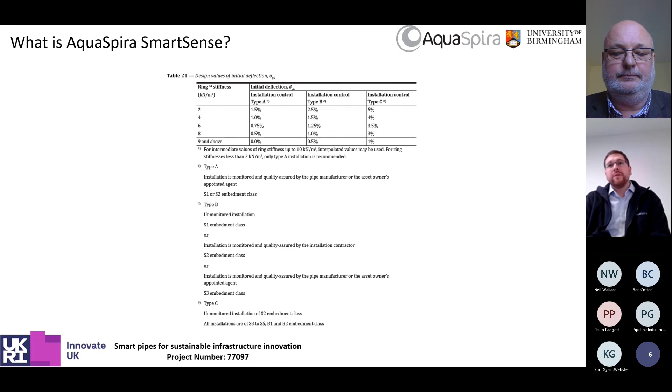Every flexible pipe manufacturer knows that installation of the product is the most important consideration when using flexible pipes. BS 9295 highlights this fact with the incorporation of an installation control type, which provides an increased deflection percentage based on backfill material and competence of the installer. For the best installations, there is a requirement for supervision and for the use of S1 material.

Now, sadly, with the increasing costs and the requirement to keep carbon emissions low or to eliminate them completely, there is a requirement to basically monitor these installations. We think the answer is the use of technology, and that might provide the answer.

By embedding sensors into the pipe, it can be monitored without the need of an extra person attending site, and potentially the primary backfill around the pipe can be changed to something more sustainable, or we can use the as-dug material on site. Previous projects of this nature have used sensors just glued onto the surface of a structure, such as using epoxy resin to glue strain gauges onto a pipe wall. We have gone one step further and embedded the sensors into the HDPE.

The original idea was developed to monitor the installation of a pipe on site, but we soon realized that sensors could be used to do a lot more. For instance, prior to installation, to monitor if the pipes have been dropped or damaged on site; during the installation, to monitor the stress and strains within the pipe, but also the compaction density around the pipe; and then after installation, to continue to monitor the structure of the pipe and its local environment.

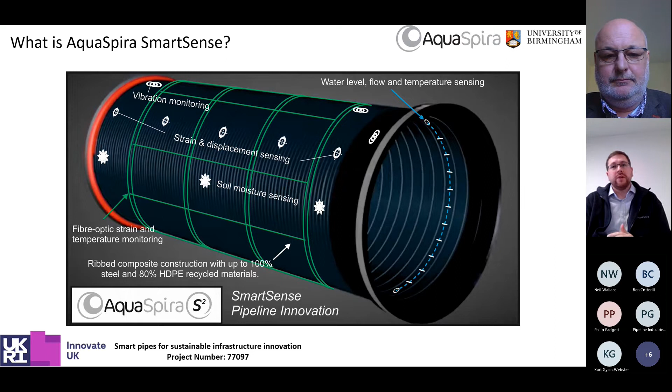In 2021, the University of Birmingham and Aquaspira submitted a research proposal to Innovate UK, where we were successfully awarded £250,000 to complete the first step of making SmartSense a reality.

So where did we start? Well, we first started by evaluating the raw materials and looking at our internal recycling streams. We looked at our use of HDPE and evaluated the internal recycling stream to make sure that the heat cycles we put the materials through did not degrade beyond the point of what the virgin material we use to make the pipes does. Secondly, we evaluated the steel that is encapsulated within our ribs.

We checked the density of the recycled HDPE to make sure that it stayed the same throughout the process as a recycled variant of it. We also used a melt flow index machine to check the flow rate of the materials to see if the different recycled material blends are still within the specifications we run internally.

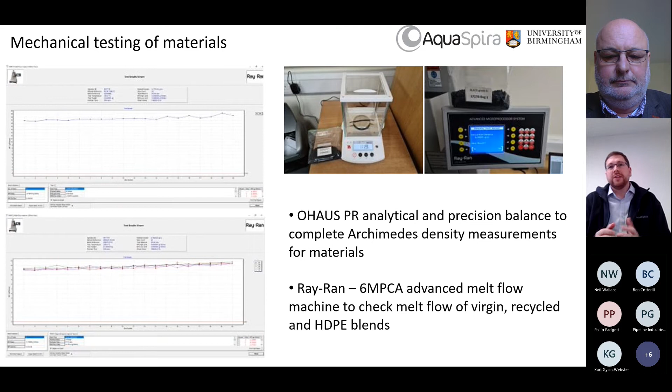We evaluated the mechanical strength of the HDPE and steel components using our in-house tensile tester machine. This entailed testing the waterway wall seams, butt welding of the component parts, and the properties of the steel. We looked at different blends and properties of materials to combine them together to give us the best mechanical properties for our pipes.

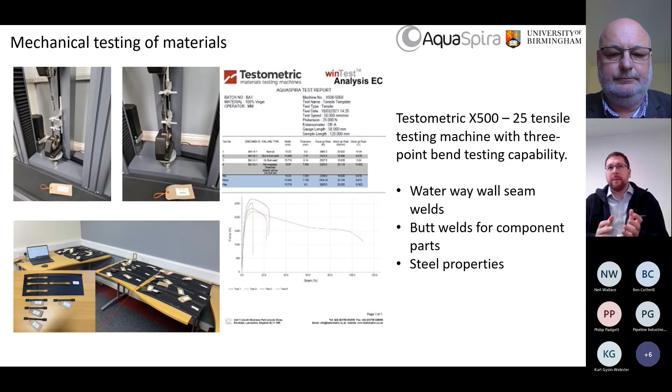Finally, we evaluated the ring stiffness of a number of pipes, assessing the resistance to load and ascertaining their ring stiffness values. To do this, we used the method set out in BSEN ISO 9969, though this standard is not directly suitable for our product, but we leaned on it. During mechanical testing, we varied the test setups to see how they affected ring stiffness values, looking in particular at the elastic and yield point of our product. This information was used to evaluate the finite element models we produced internally.

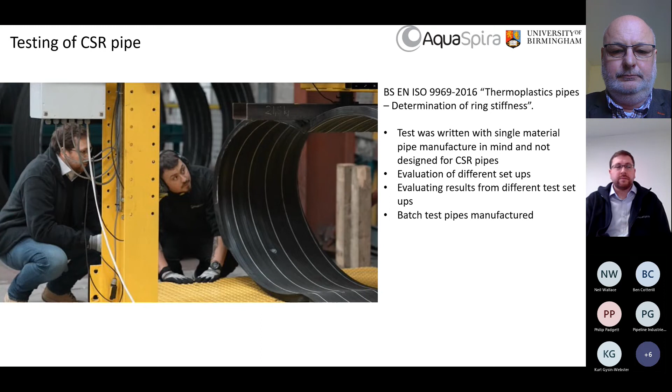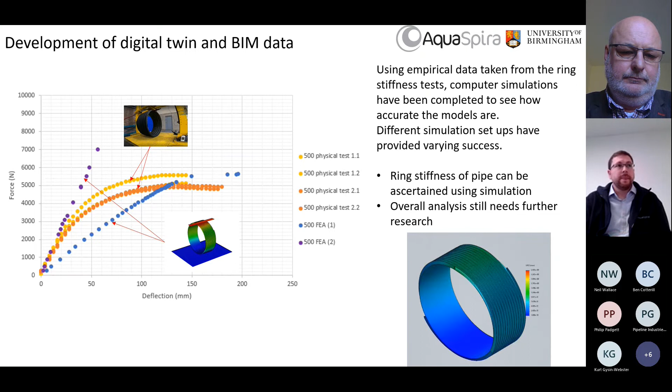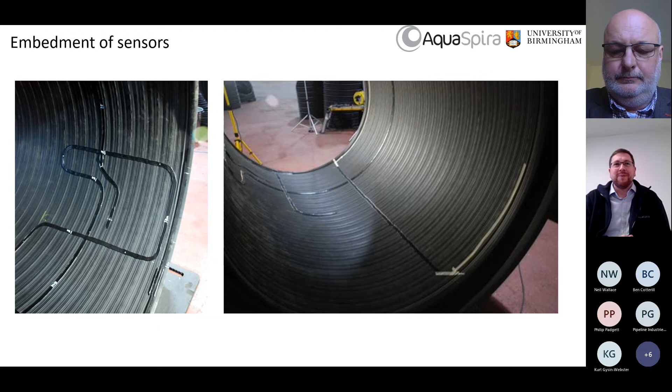Without going too much into the details, what we're trying to do is replicate some of the ring stiffness tests in principle. We'll also expand on that so we can get very accurate data to help support, optimize, and ultimately ground truth the finite element models, the digital twins as they're developed.

For our above ground tests, completed a few months back, we take 2 sections of pipe, put them together as an interface coupler, and do a 3-dimensional ring stiffness check test by loading them with different deflections and loads, measuring the strain using fibre optics and strain gauges, and the displacement using linear transducers of the pipe as a whole. We also used prisms to look at the 3-dimensional shape.

With the test, we created a number of different scenarios, either with a linear load, or, as on the left-hand side of the digital model, a cone load where the load is distributed amongst the segments and ribs of the pipe itself. This gives us more control over the movement of the pipe as we look at the 3-dimensional structure. We've got over 150 gigabytes of data on these tests alone, so we have very high resolution, high accuracy data that helps inform our digital models.

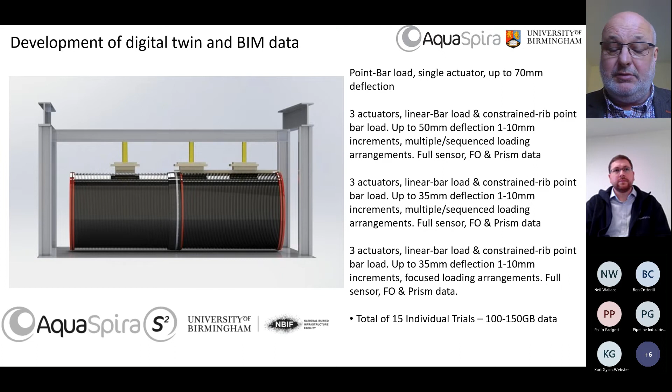Going through the sensors themselves, you can see the fibre optics. The green one is a dynamic fibre optic, meaning we can measure up to 10 hertz, actually measuring the dynamic load and strain changes through the fibre optic. The rest either wrap circumferentially or longitudinally in patterns - a static fibre optic system that we run before, after, or during a test, giving us a snapshot of the strain at roughly centimetre resolution around the whole fibre optic, and that can give us microstrains down to around 10 microstrain level.

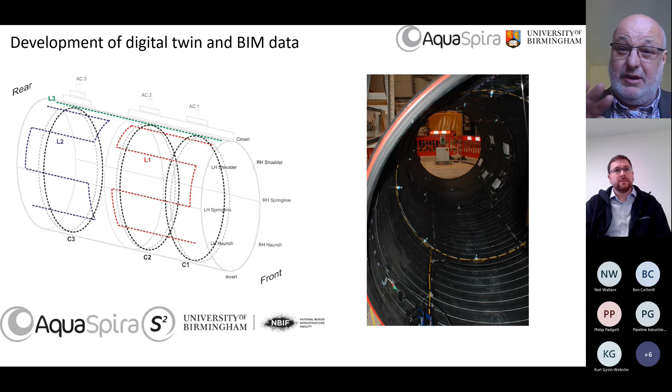These are also complemented by load cells on the actuators, strain gauges at circumference on spring lines, invert, crown, haunch and shoulders, and also linear transducers picking up the displacement of the pipe as we deflect and load it. Typical loads are up to about 5-6 tons, a bit more than that, and our deflections around 5% maximum, typically in increments of about 1%.

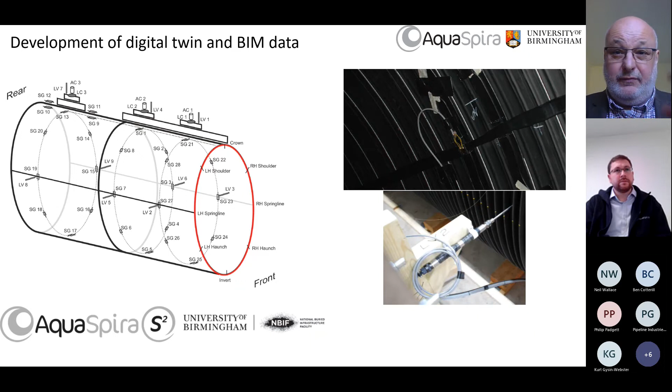So you're looking at millimeter increments as the most finest resolution, up to about 90 to 100 mil of full deflection. And they're complemented by these prisms.

This is with a company called BMO, who does tunneling research, and they want to move from prism-based measurements into fiber optics. So we piggybacked with them, and there are some really interesting results.

These prisms are able, with a total station, to map the three-dimensional displacement field, i.e. the position in the pipe, to plus or minus 0.1 of a millimeter. As we deflect the pipe and it moves both up and down and in its radial, linear direction, we're able to see the distribution of the actual pipe structure as we do the loading.

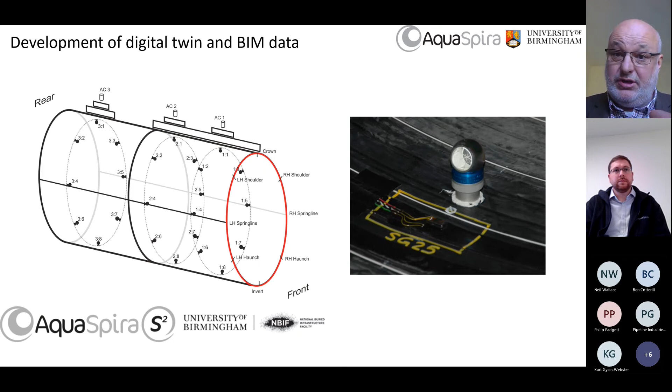So you can see the prisms actually highlighted by the flash on the camera inside the pipe, the total station setup automatically controlled, and the setup of the above ground test in the National Buried Infrastructure facility in the far left corner.

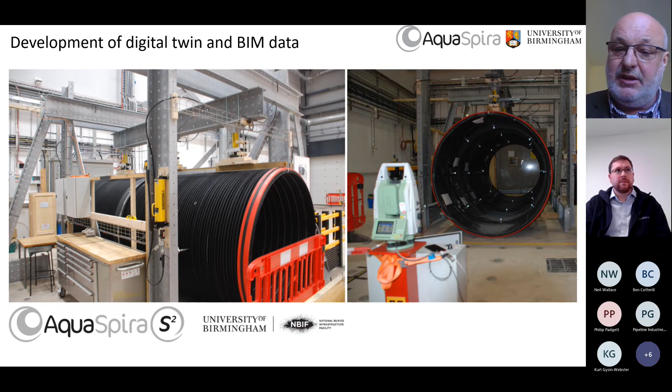Those of you who've had the pleasure to visit, you'll see that we've developed this, and we've got more and more testing in there. This facility allows us to do this both digitally, because we can model it, but also as a physical ground test. You can see the loading beams and all the data collection scenarios and equipment set up on the pipe.

So to give a little example, you can see the pipe being deflected around about 100 mil. These are the results we've got from the fiber optics and the strain. You can see that the displacement of the pipe, as you'd expect, sort of flattens up a bit, but you can see the strain patterns around the pipe.

We're looking at around about 500 to 1,000 microstrain, both from the fiber optics and from the strain gauges, so they match well. This gives us control and understanding of the nature of the stresses acting on the pipe and the strains distributed across it, so that we can then calibrate our digital twins.

So when this goes into the ground, we're confident about the results that we get, but also we can then tweak the digital twin to actually give us a very accurate representation of what goes in the ground.

As you can see from the snapshots of strain, the dynamic strain tells us about the arrangement in the environment around the pipe itself, so the pipe is acting not only as a sensor for itself, but also as a sensor for its buried conditions. And that's where we're going with SmartSense.

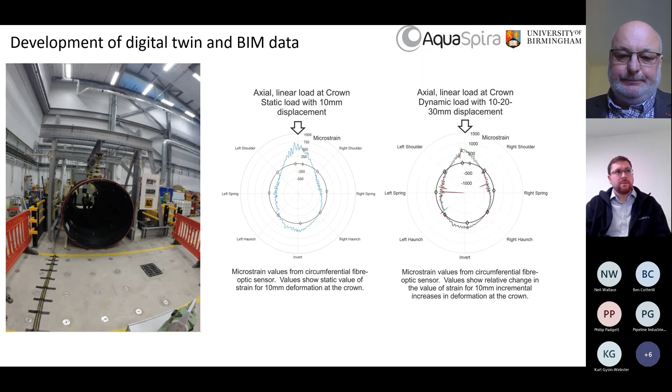So we take this to the next stage further, and this is literally what's happening in the buried infrastructure facility at the moment now. On your left-hand side there, you can see the hydraulic actuators, which are representing loads.

We haven't tried to make it exactly like a railway line or exactly like a road, but we're actually trying to mimic the loading conditions so that we simulate a rail structure, a slab base, but also an axle weight for a lorry or a tram, so you can see the loading conditions on the pipe that's buried in the ground.

And you can see the pipe situation has expanded in concept. You can see the long two sections of the pipe, and under the green tarpaulin sticking up, there's actually a chamber. It's an elbow. It's a 1.8 meter diameter pipe, and that elbow sticks above the ground, representing an access chamber.

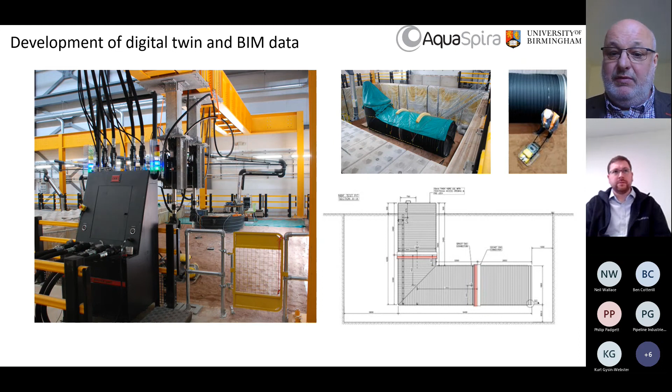We want to be able to see the stress strain relationships both on the pipe and on the structure. It's actually a manufactured structure. So we've got fiber optics and sensors wrapped around the whole system.

You can see this photograph literally taken a couple of days ago. We're setting up the static loads at the moment, and I was in there yesterday actually doing vibrational loads, and we've got a digital twin version that we're calibrating at this moment in time.

Poor resolution, but you can see the sensors that are wrapped around the pipe. We've got strain gauges and fiber optics, both dynamic and static. We've got load cells, and we also have some quite interesting scenarios with soil pressures, both below the loads and off the side.

So where that legato block wall is, we've actually got soil pressure sensors indicating the soil pressures at the spring line and at the top, effectively the crown level. So we can see the distribution of stresses in the soil, the pressure distribution around the pipe at 1.52 meters away from the load and around the pipe as well.

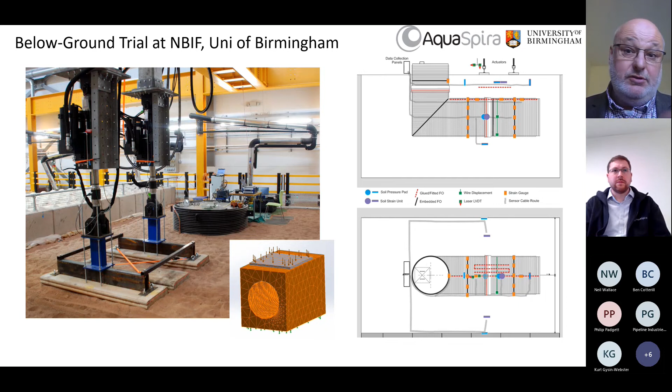Next one, please, Paul. So to give you a hint of where we're going, I think we've included these because this is really interesting to our PIG colleagues about pipe installations. One of the things we're always concerned about is whether the pipe is installed properly - what does it look like, how does it change, and can we use the SmartSense sensing to determine whether the backfill's been put in properly, or if there's a change in the future, what that change represents.

So on the left-hand side here, you can see the preloaded conditions. We filled basically to the bottom of the pipe, plonked the pipe in, and the pipe is just resting there, effectively under gravity. The red circle you can see is its rest position, as you'd expect - it's gone a little bit oblate over its own weight, and the black circle would be the perfect conditions of the 1.8 meter diameter pipe.

We've then filled it up, and we can see this in the green level. We've compacted to specific densities, filled up to the crown, and you can see that the pipe is sort of contracted in the center, as you'd expect, but pushed up at the top. The strain gauges are measuring similar levels of strain as we saw with the above ground test, and those arrows shown on the picture represent the amplitude and the effective bending moment that those strain gauges are picking up.

So if you have compressional strain on the outside, they're pushing outwards, which is the effective movement you would expect. We have linear displacement inside the pipe, and you can see the pipe's gone pretty much 11 mils expanded in the crown to invert, and about 4 mils retracted in the center, showing that as you bury and compact around it, the pipe will squidge, for want of a better word.

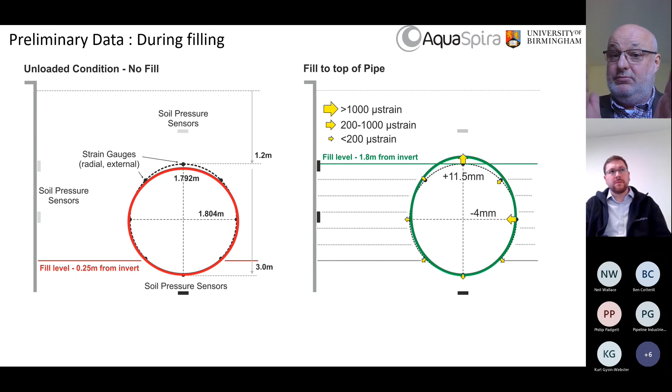Thank you, Paul. Next one. So we're now moving on to fill, again compacted fill, up to the 1.2 meter above crown level, the standard level we've set. You can see the soil pressure sensors there - we've got around 7 kPa above and below the pipe, interestingly, but also about 9 kPa at the extremities of the pipe wall, showing that the soil pressures, the stresses, are distributed around the pipe. The pipe is acting as an arching structure and pushing those pressures around - the stress field, as I like to call it, is distributed around the pipe.

This is reflected in the strains. You can see the strains going up, and the pipe has obviously, as you'd expect, dropped, but not completely. We dropped about 6-7 mil, and it's now going into a more circular cross section, but we still have some non-oblate deformation in the pipe itself.

The next set of tests is we put the static load, which is effectively the slabs, and the actual bases of around 450 kilograms across that footprint of concrete, effectively replicating a slab load. We can see that the pipe has rested back to almost close to its ideal position. The soil pressures have gone up, doubled as you'd expect, but the strains have also distributed themselves around the pipe.

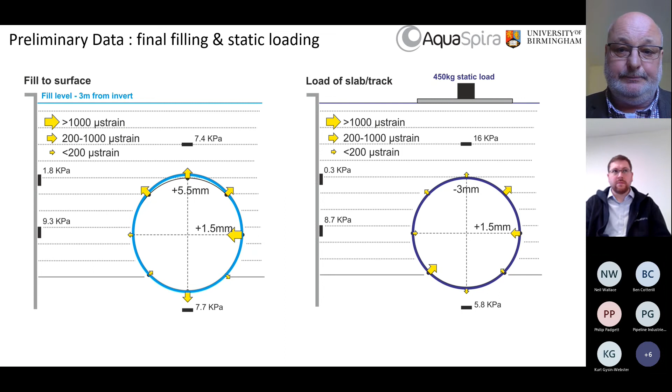This is sensing effectively the pressure of the soil, the sediment in the pipe as it fills up. This is the next stage of where SmartSense will go. We've demonstrated this at a few events, and we've got quite a lot of traction for the water industry and Network Rail, because we're able to accurately determine the thickness of sediment lying in the pipe.

Our goal for the next stage is to develop this as part of the SmartSense product and bring that innovation in, so that it can automatically determine whether your pipe's filling full of materials. You've got the installation materials, and any perturbation in the stress strains on the pipe can then be thought about, whether it's something in the pipe or outside the pipe affecting it. That's where we're going with SmartSense in the next stage.